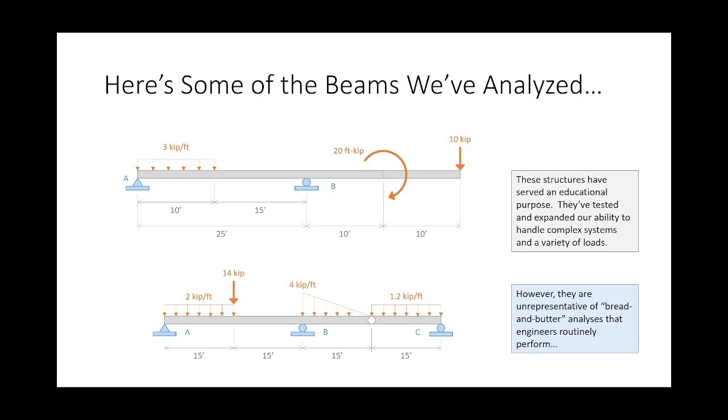But let's talk about some simple stuff. Let's talk about some bread and butter analyses that you're going to perform all the time. Let's take a look at these problems. Now, I have a cantilevered beam over here on the left that has a uniformly distributed load. It's 25 foot long, and it has 3 kips per foot on it.

Now let's look at the beam on the right. I have a cantilevered beam, 37 foot long, with a distributed load of 1.95 kips per foot. Is there really any difference between these two problems? No. I would argue these are the same problems with just different numerical inputs.

It's a cantilevered beam with a uniformly distributed load. Wouldn't it be valuable if I had a tool that could tell me what the results are for any cantilevered beam, for any uniformly distributed load? And if I have that, I can use that routine analysis aid over and over again for these routine computations.

This is a very routine problem. You have a cantilevered beam, it has to be able to support its own self-weight. Boom, there's the problem right there. Engineers deal with that all the time. Simply supported beam, uniformly distributed load — that's going to be the function of your homework assignment. Common. Engineers do that all the time.

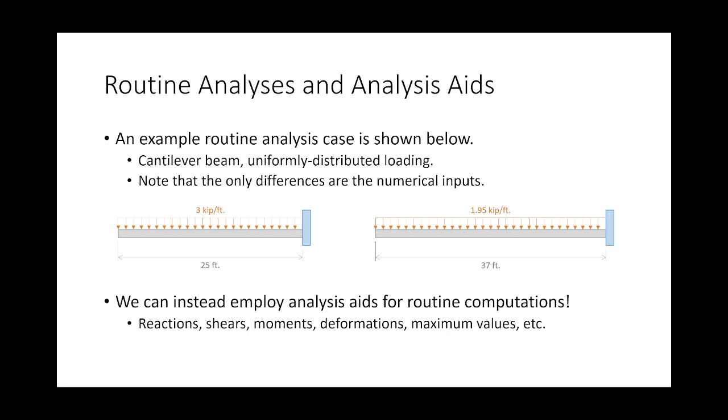So let's talk about analysis aids. This is an analysis aid. You can Google this right now. If you literally Google shears, moments, and deflections, this is one of the first results that pops out. What you will find is that many code spec bodies will generate these. And first off, there's nothing really special about this — you can probably find this on Wikipedia or just a Google image search.

But I like this one. This is from AWC, the American Wood Council. So if you're designing timber structures, they have a Design Aid 6.

Design Aid 6 is just shears, moments, and deflections for typical loading scenarios. This is scenario 12, figure 12: a cantilevered beam with a uniformly distributed load. Look how they've structured this out. Here's the cantilevered beam with the uniformly distributed load, and here's what the shear diagram looks like. Constant load, linear shear diagram, parabolic moment diagram.

Look what they've given us. Here's the reaction. Here's the shear as a function of x. Here's the moment as a function of x. Here's M max, here's shear max, here's the maximum deflection, and here's the deflection as a function of x. The whole problem is solved for you.

All you have to do is plug and chug. Now, these aids are neutral with regard to a unit system. So one of the things you will not see in the deflection equations is 1728 — you will not see 144 times 180 over pi. The idea is that you use these equations for whatever unit system you want, and if you want to use conventional US units, you apply the 1728. So when we derive expressions, we won't account for the 1728. You, as the analyst, do that when you're using them.

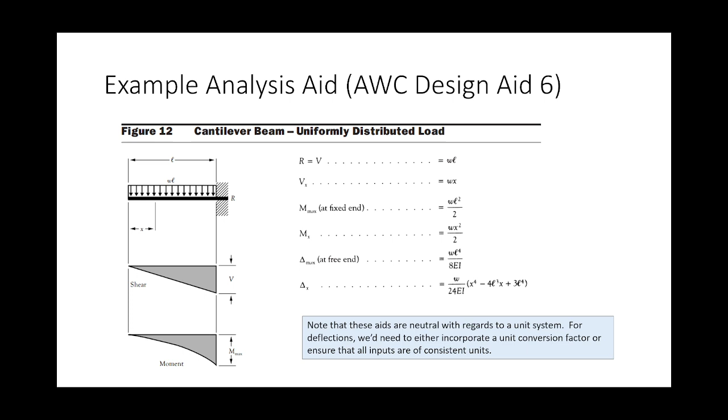You got to be careful when using these aids, though. In some instances — this is from the steel manual, which has these aids inside it as well — here we have a simply supported beam with a triangular load. You got to be careful about what the terms are, okay? Here's the simply supported beam, here's the triangular load. Look at R1 and R2 — those are the reactions, and it says R1 is W over 3 and R2 is 2W over 3.

But W is not this, okay? W is the total amount of load. So W is 1/2 base times height of this triangle. So you got to be kind of careful when you just plug and chug values in. I'd say the most care needs to be exercised when dealing with triangular effects, because what they use for W is usually the total magnitude of load, not the magnitude at the top. Just be careful on that.

All right. Any questions?

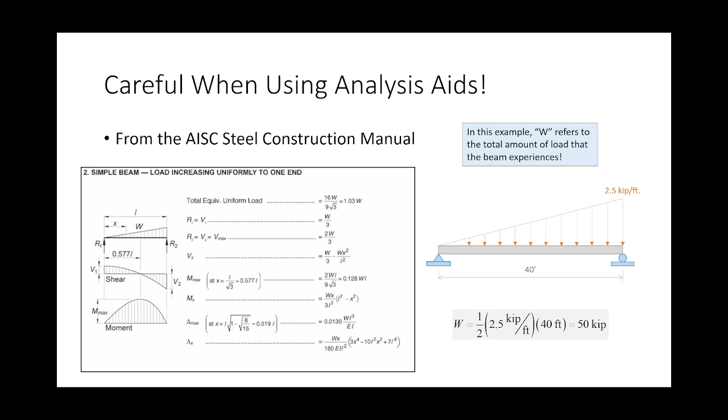One other thing you need to be careful of is adding terms from multiple analysis aids. Okay, check this out. This is a simply supported beam with a uniformly distributed load across the entire beam, but then I also have a 17 kip load. But look, that 17 kip load is not at midspan — it's kind of off. Everybody see that? So here's my point.

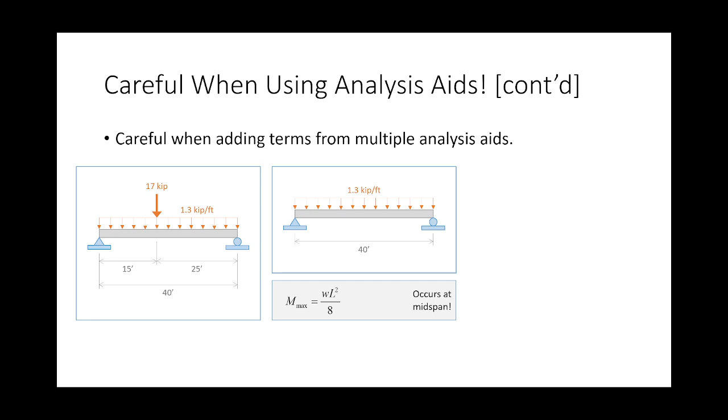If you look at the uniformly distributed load and pull up the analysis aid, it says the maximum moment is WL squared over 8. You take this W, this L, times this squared, divided by 8 — that gives you the maximum bending moment. If you take the point load, you say here's the point load, this is P, and it tells you what A and B are — just these two dimensions here. P times AB over L gives you the maximum moment.

But the problem is they don't occur at the same spot. For the distributed load, the maximum moment occurs here, but for the point load, the maximum moment occurs at the point of load application. So you can't just say that the maximum bending moment is this plus this — that doesn't make sense because they're not at the same spot, right?

What you have to do, you can handle it a couple different ways. You can add the functions — the m of x for the distributed load and the m of x for the point load — add those functions, differentiate to get the shear function, set that equal to zero, solve for x, plug that value of x back in, like the whole calculus approach. Or you can plot the moment diagrams in Excel for each of those functions, add them up, and see where the max is. So just be careful when maximum moments don't occur at the same spot.

If this 17 kip load was at midspan, then you could just add this and this, because the maximum moment would be at the same spot. Does that make sense? Any questions?

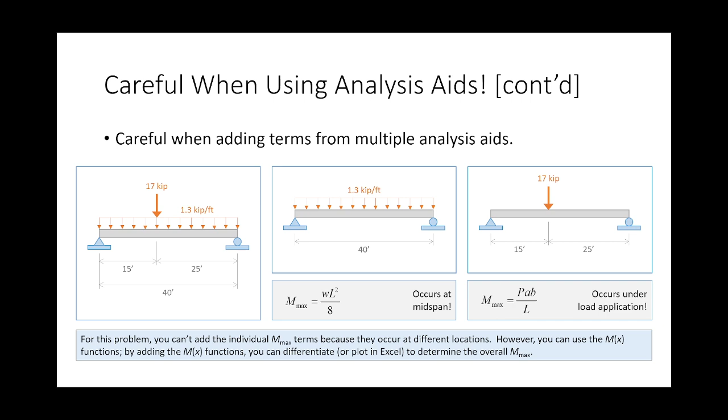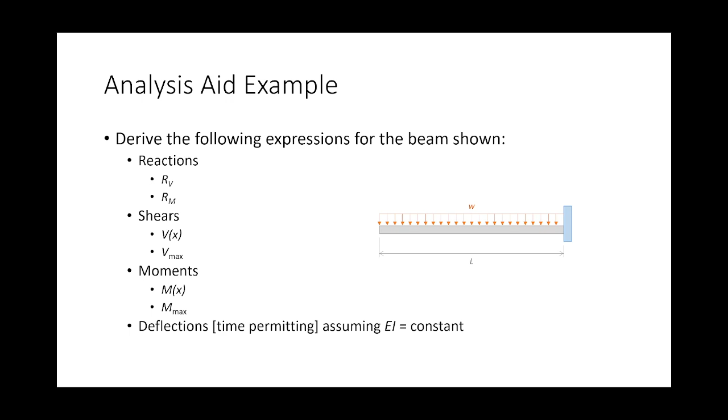In order to fully understand this, I would like to derive analysis aid expressions for a cantilevered beam subjected to a uniformly distributed load. We are going to determine the reactions, the shears, the moments, and deflections if we have time.

Okay, so here's our cantilevered beam with a distributed load.

Now, if you remember when I recorded the results video for exam 2, I said one of the things you've got to stop being afraid of is X. We are going to see some variables here, so be aware of that. But there are reasons for that, reasons that engineers would throw the letter X around. This is one of them, okay? So this is going to get symbolic. We're going to live in alphabet soup a little bit.

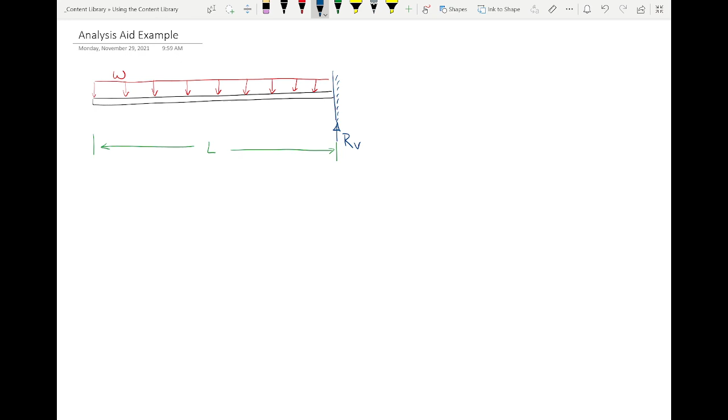So we have a beam that's L long, subjected to a W distributed load, right? And what we'll do is we'll say that we have a vertical reaction and a moment reaction. Now, I would argue that this reaction and this reaction are a function of W and L, right? So maybe one way of looking at it is to say that my...

You're a tough crowd this morning.

But in all seriousness, I know that this might seem like I'm being facetious, but there actually is some truth to this, that every equation that we derive should be a function of W and L, right?

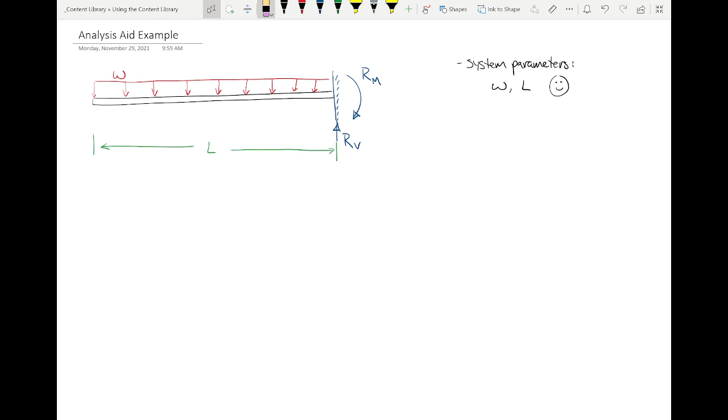So let's handle this. Here, I'll get rid of this. Let's handle this like we would any problem, okay?

What can I do with this distributed load? I collapse it into a point load. What is the magnitude of that point load? WL. Make sure that you're familiar with that. This is WL. And what is this dimension right here? 1/2 L.

So if I sum forces in the y direction, help me out. What do I have going up? I have RV. What do I have going down? So this is WL.

Boom. There's a formula right there. So no need to do any statics or any analysis. Given a cantilevered beam with a uniformly distributed load, the vertical reaction is WL. Just plug and chug. What about the bending moment?

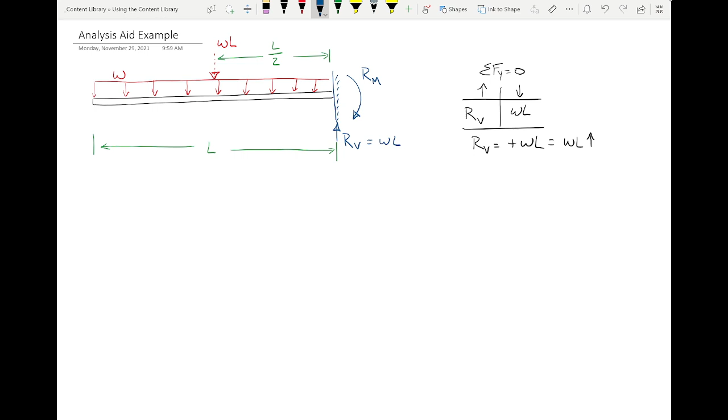Let's sum moments at the support. So what do we have? We have RM going like this. And what do we have here? How do we define a moment? It's a force times a distance. What's the force? What's the distance? What's the force? WL. And what's the distance? All right, WL squared over 2.

Is that fair? What do we think? So let's continue on with this.

I start at 0 for my shear diagram. What does my shear diagram do from left to right? Down in a straight line to what? What's the point it goes down to right here? WL. And then that reaction kicks it back up to 0, right?

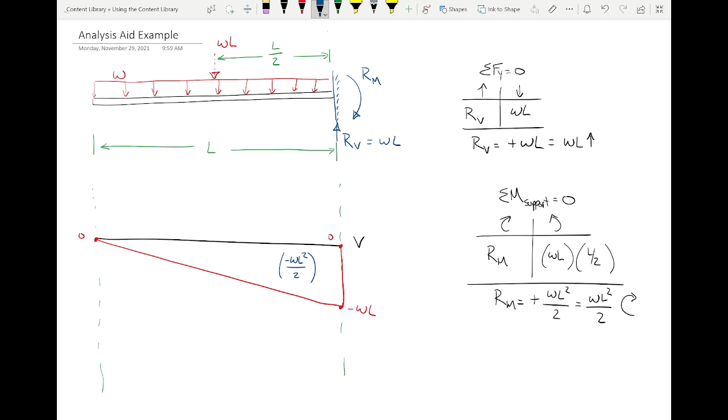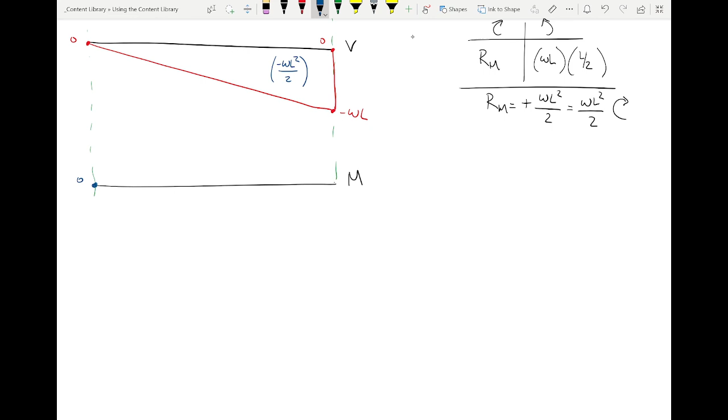So I go to 0, and what does it look like? It goes from little to a lot, something like that. I'll do better than that. Hold on. There's your shear diagram. There's your moment diagram. What do you think?

What if I wanted the shear here, or the moment here? Maybe I ought to cut a section, right? Let's test some of those skills that we developed during exam 2. How many functions are needed to fully define this moment diagram and shear diagram? 1. So we just need to cut an arbitrary section.

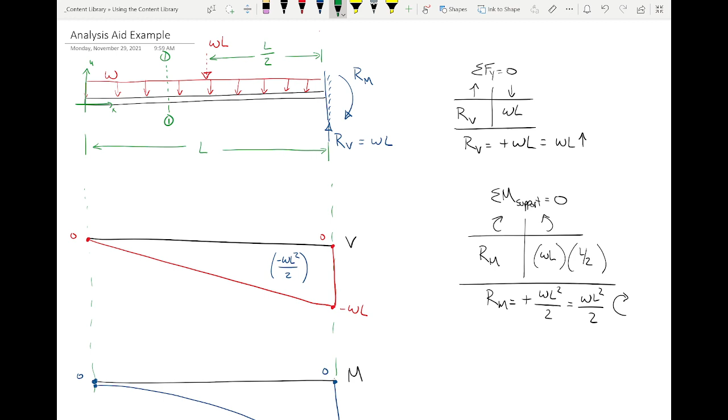Now, notice how there's no coordinate system here. Where should you put the coordinate system? Remember those little Dr. Mike's tips and tricks? To the left, right? On the free end. Cut a section, look towards the free end, remember? So we'll put our coordinate system right here. And we'll cut a section, look that way. So...

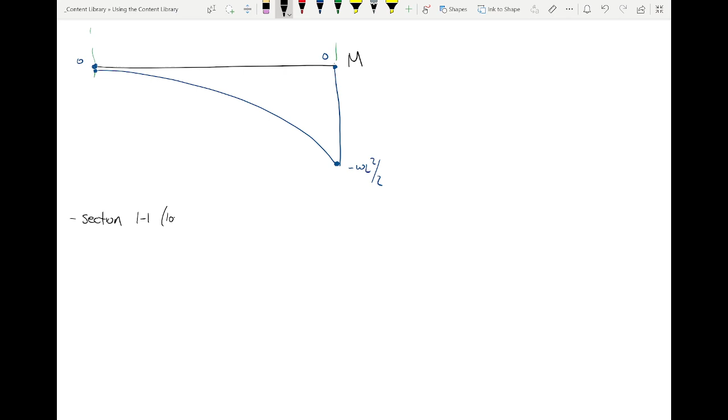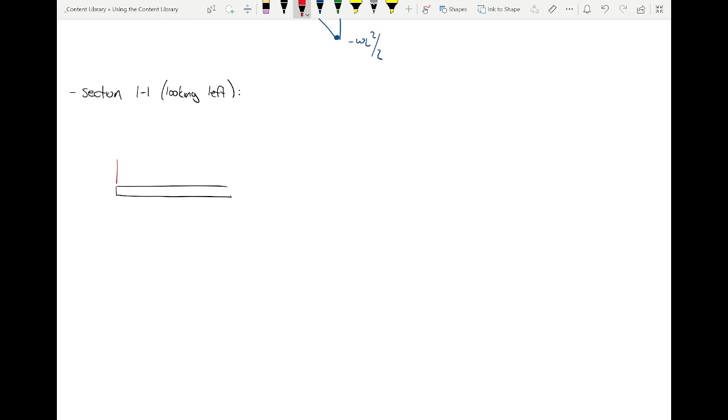When we cut a section and look that way, here's the section, right? This is W. How long is this segment here? X. So collapse this into a load that's how much? And this dimension here.

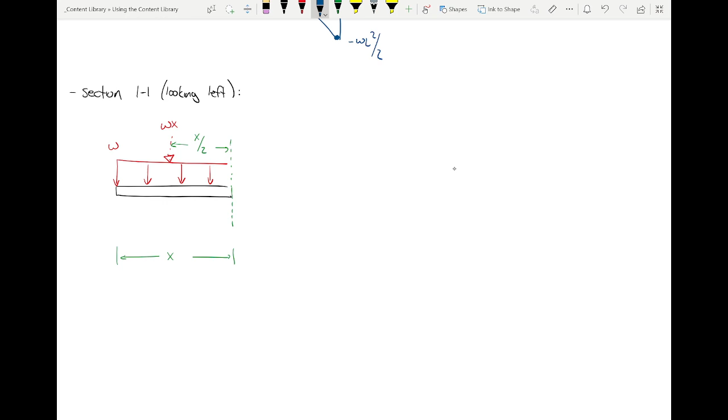I cut a section and look to the left. Which way is positive shear? Down. Exactly right, down. So which way is positive moment? There we go.

Same process. Down is V, down is WX, right?

How about summing moments at the cut. We have M going like this. WX times X over 2 going like that. Did I do that too fast, or are you okay with that?

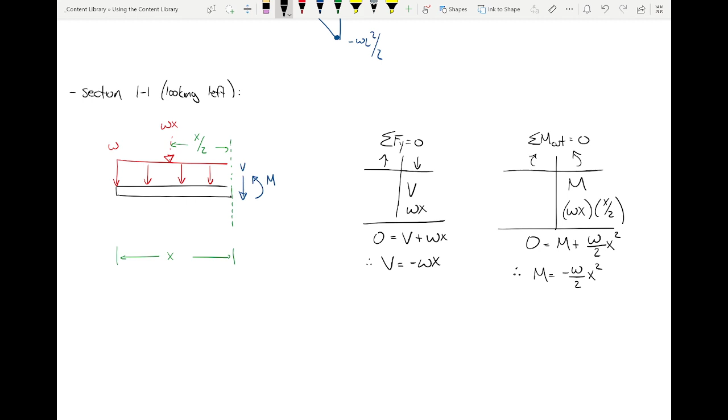Am I okay with this? So let's just summarize so far.

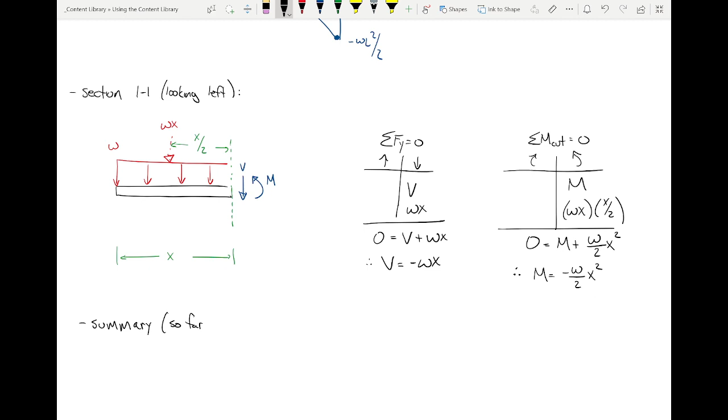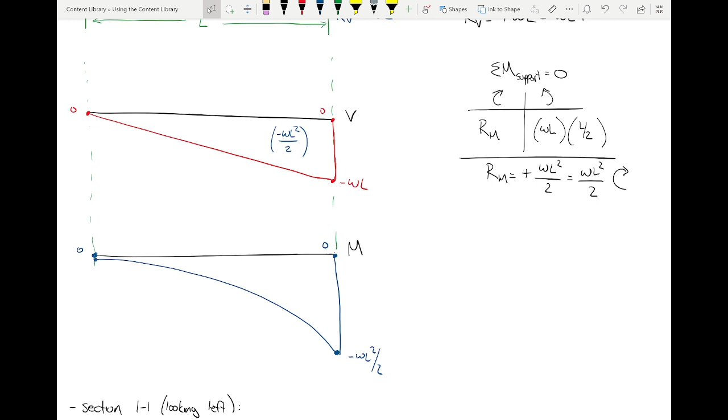By the way, from our shear diagram, what is the largest magnitude of shear? The negative WL, right? What's the largest magnitude of moment? That right there, right? So let's just see something. Would you agree with this?

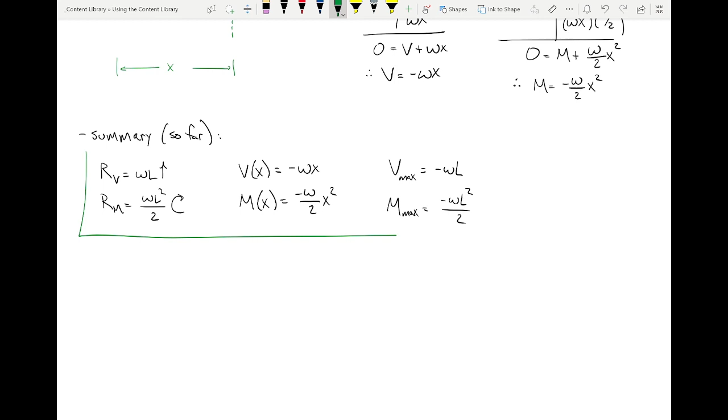Think about what's inside that box. We never have to draw a shear and moment diagram for a cantilevered beam under a uniformly distributed load ever again. That's what that box is giving us. We just did it. That's it for every permutation of cantilevered beam with a uniformly distributed load. Every one.

You want the maximum bending moment? Boom. Right there. You want the shear at some random point on the beam? Boom. There you go. That's what it gives you.

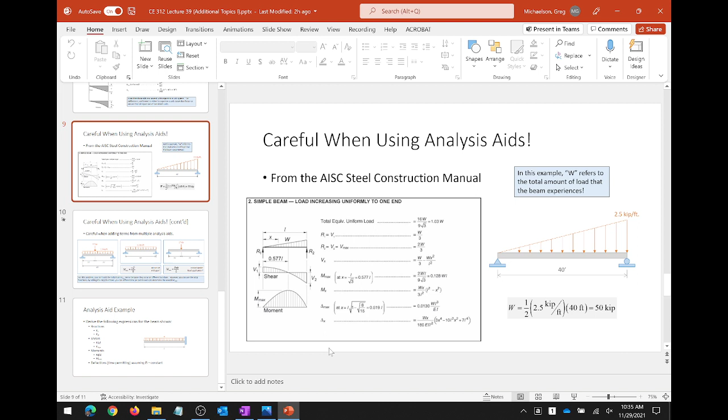The maximum deflection. How'd they do that? Well, what method have we been using to compute deflection this entire semester?

The method of virtual work. When we use the method of virtual work, we are required to do a real analysis, and we are required to do a virtual analysis. How does the virtual analysis work if I wanted to find deflection at the free end? Remind me, what do you do? Say it again.

Pick a point of interest, in this case the free end, and then what? The load of 1. Remove all the loads, put a load of 1 at the point of interest in the assumed direction of displacement, right? So which way do you think that this point is going to deflect, up or down? Down. So let's see what happens.

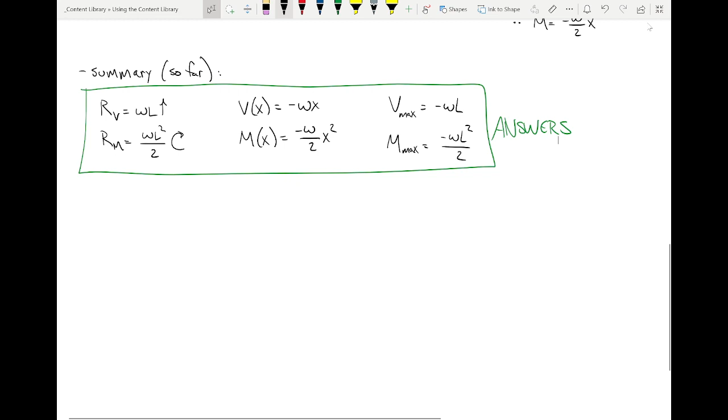Okay? Now, recall, we already have a real moment function. We just did that, right? So what about a virtual moment function? So real moment...

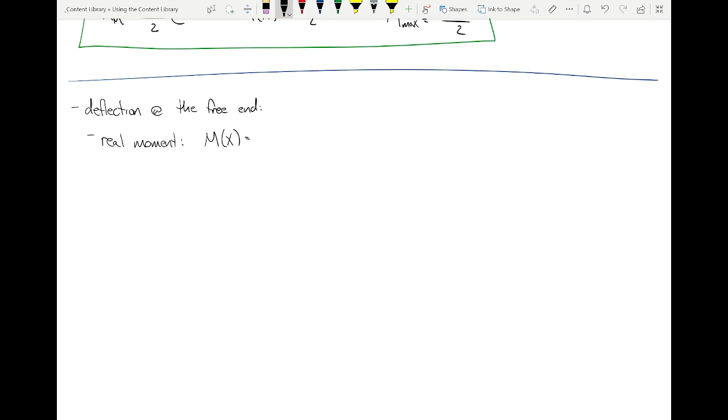W over 2 x squared, which, by the way, here's something I didn't do. Can anybody look at these? Does this pass the smell test? What is the derivative of this? It's that, right? So that's another check that this is right.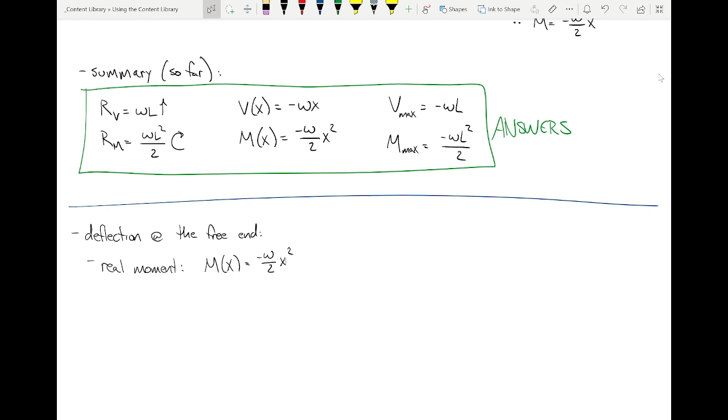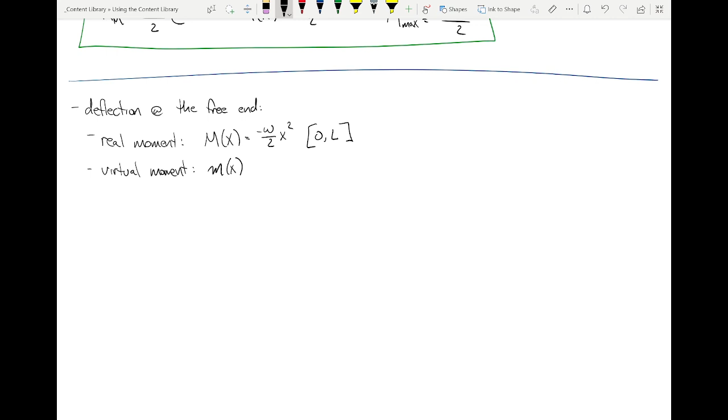So virtual moment, oh, by the way, this is from 0 to L. So we need a virtual moment function, right? So what's the virtual structure look like? Well, it's this.

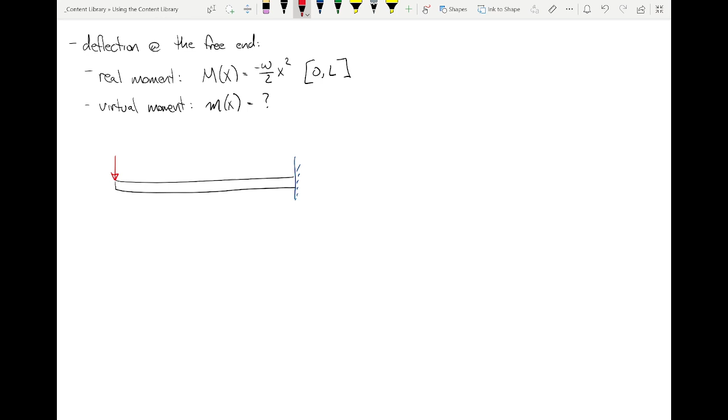And we place a single unit load, right? And then what do we do? Cut a section. Look that way. Positive shear. Positive moment.

I only care about the virtual moment. So over here, let's just make sure that we recognize this is all we care about. We have our virtual moment. What else do we have? 1 times x on the left or right side? So...

0 is m plus x, or m is minus x, right? Valid from 0 to L, right?

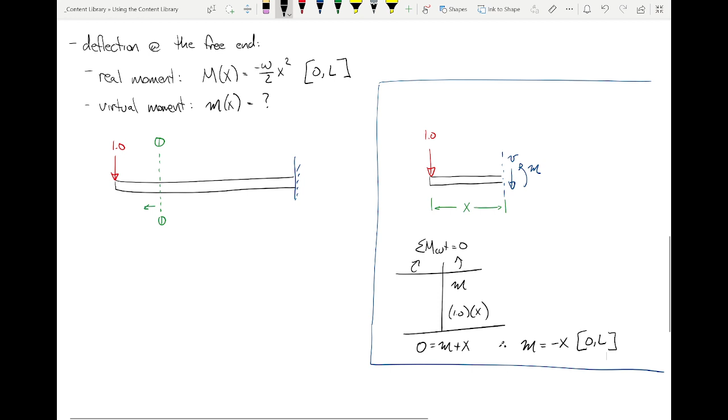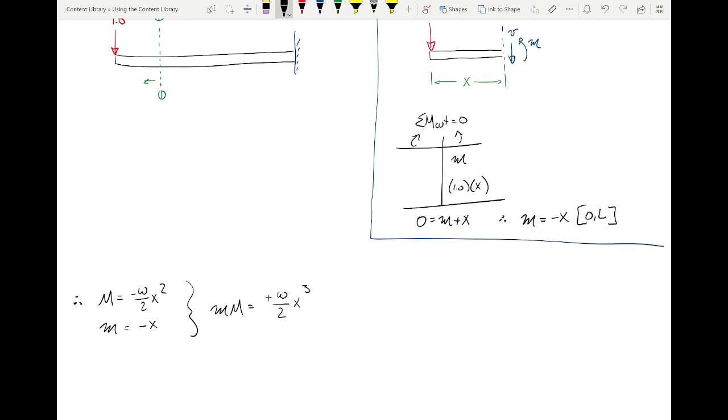So m is that, little m is that. What is little m times big M? Positive W over 2, what is that, x to the third? Is that fair?

And so how do we determine deflection at the free end? What do we do? Deflection at the free end is the summation of all of our integrals of little m, big M over EI dx. Isn't that the method we've been using? So we only need one integral, right?

And so what are we integrating? We're integrating this from 0 to L, but what did I forget? I got to have my 1 over EI, right? Because we're integrating little m, big M over EI. Is that okay?

So what do we do? How do you do an integral like this? So this is an integral with respect to x. So everything that isn't x is a constant, right? So I can factor the 2 out and I can factor the w out. So then it becomes an integral of this, and now it's just an integral of x to the third.

Now you better be able to do that. What is the integral of x to the third? X to the fourth over 4. So this is evaluated from 0 to L, right?

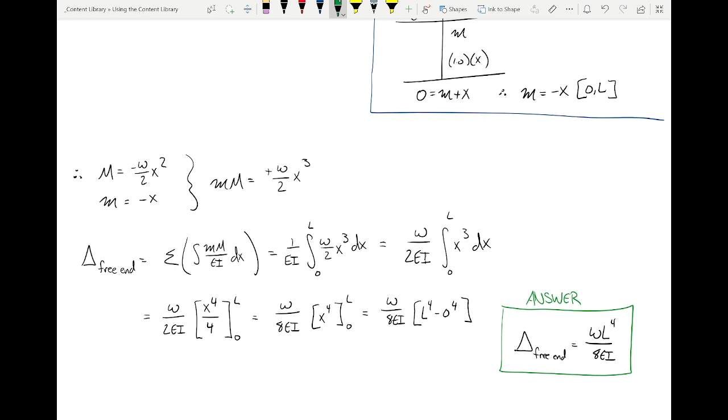What do you think? Does that match? WL to the fourth over 8EI.

So how would you use this in the real world? Let's say this problem on the left: W is 3, L is 25, E could be 29,000 KSI, I could be 600 inches to the fourth. Just plug and chug and multiply by 1728. There's your deflection. That's it.

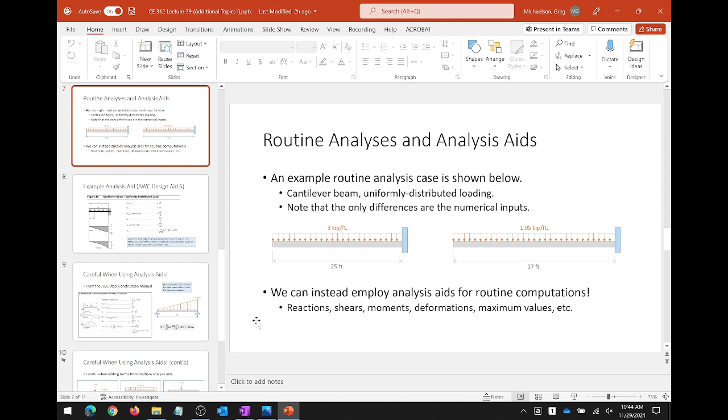Now, is there anybody curious how you do this? This is the deflection at the free end. This is the deflection anywhere. I'm going to show you how they do that, but I'm not going to make you do it, okay? I'm going to show you so that you understand. But does anybody have any questions on this?

I want to stop to make sure that everybody understands how this works. Does everybody understand how this works? Structural engineers use this all the time. They use these all the time, okay? But I want you to have some respect for where they come from and how they use it.

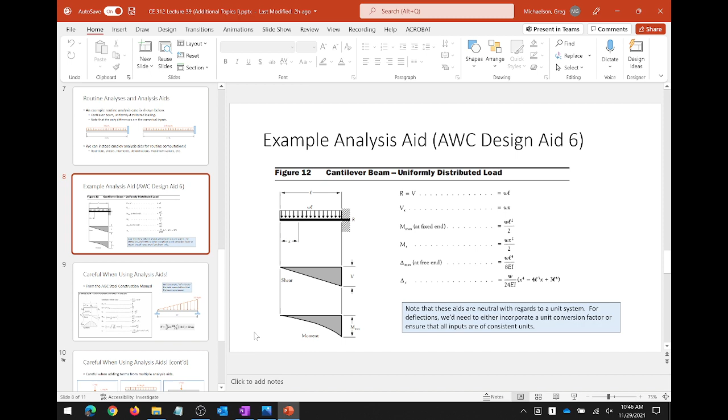Now, before we go into this last part, I think we're probably going to run out of time. I might do a little quick video on how to do this last part. I want to pull up the homework assignment because I want you to understand what we're going to do on the homework. So, because I said there was some bonus credit.

The reactions—so there's no moment reaction because there's no cantilever support, it's just simple support. So I want the reaction, the shear as a function of x, the moment as a function of x, and I want the largest magnitude of shear and the largest magnitude of moment.

And if you're interested, a bonus challenge: derive an expression for the deflection at midspan, taking EI to be constant. Do exactly what we did here. Don't incorporate a 1728 unit conversion factor, but I will tell you that for your virtual analysis, your virtual structure would theoretically require two moment expressions, and so exploiting symmetry can make the problem a lot easier, okay?

What you should get is WL to the fourth over EI times some number. For example, the number here was 1/8. There is the number for simply supported beams with uniformly distributed loads. To be crystal clear, you can probably look it up, it's an easy formula to find. I'm not after you being able to find it, I'm after you being able to derive it, okay? And you don't have to do it, so. Any questions?